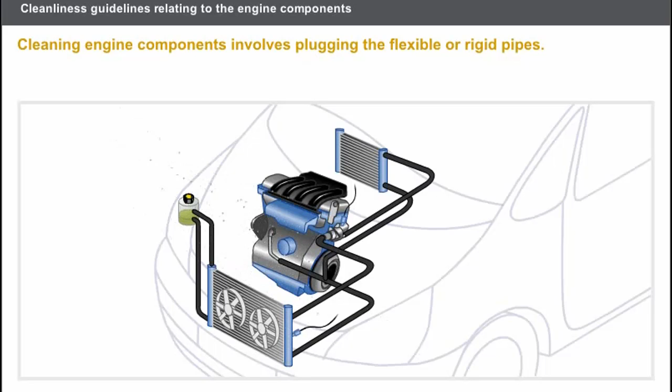Let's have a look at the guidelines relating to engine cleanliness. Particles must be prevented from entering into the various engine air, coolant, oil and petrol or diesel pipes. When removing a flexible or rigid pipe, it must be immediately blanked off using plugs.

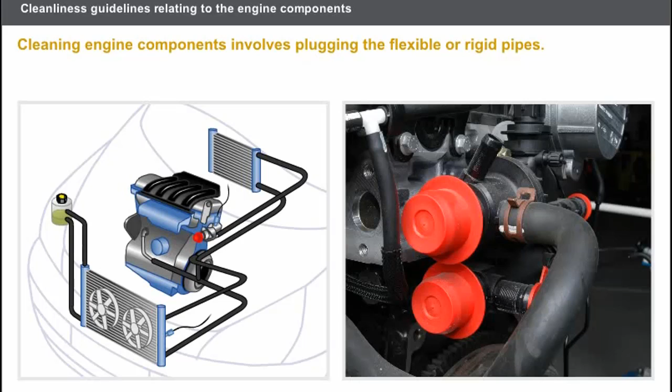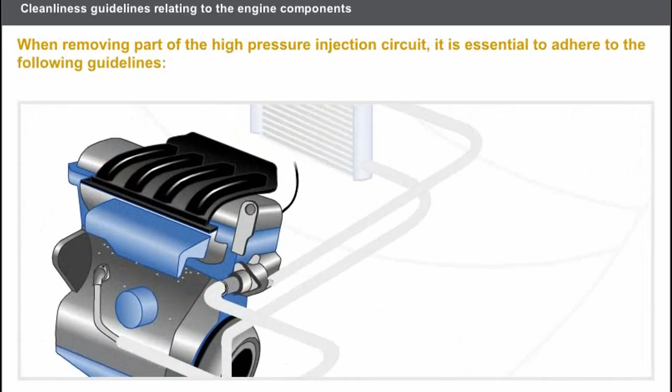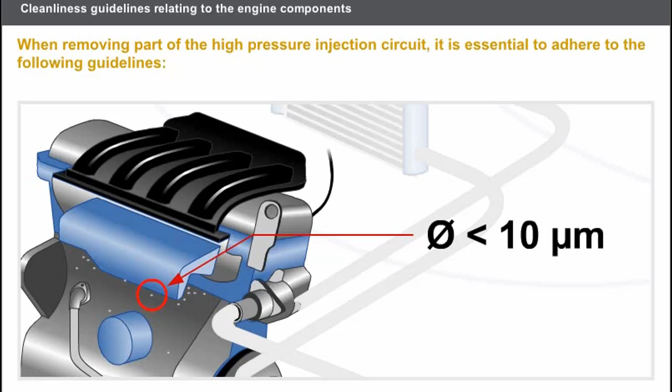Let's look at the special information relating to high-pressure diesel injection engines. Tiny particles of dust, made up of just a few microns, can cause incorrect operation of components and leakage. When removing part of the high-pressure injection circuit, it is essential to adhere to the following guidelines.

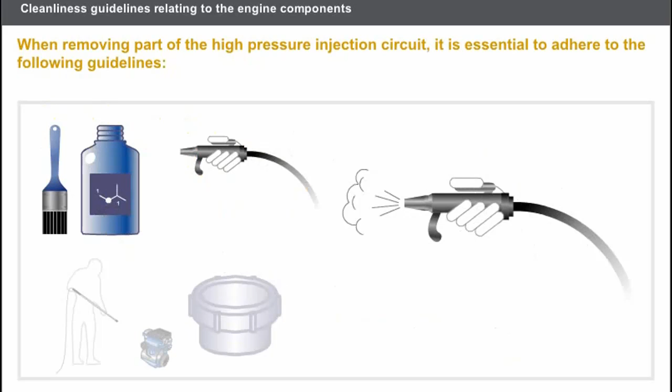Cleaning any of the areas which could cause contamination of the injection system must be done with fresh cleaning product and a clean brush that is not losing its hairs. Compressed air must be used to blow off any excess cleaning solution and any residual particles. The use of high-pressure cleaning tools is prohibited as they cause damage to the injection system and the electrical connections.

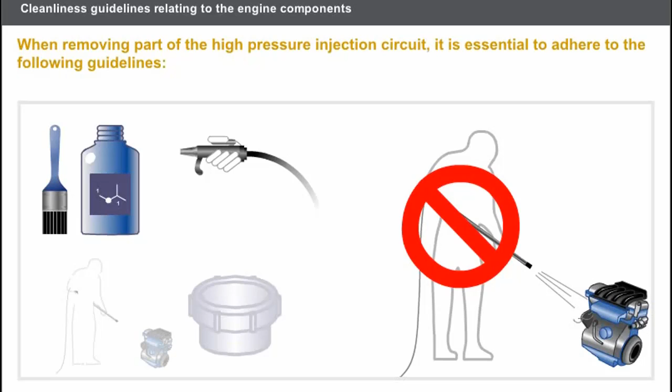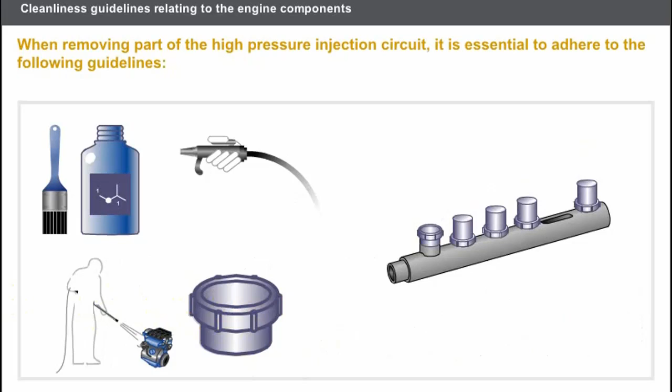After opening the high-pressure fuel circuit, all apertures must be plugged using blanking plugs available from the parts department. All used blanking plugs must be thrown away after they are used once. Before carrying out any operation, it is essential to refer to the technical documentation specific to each engine type.

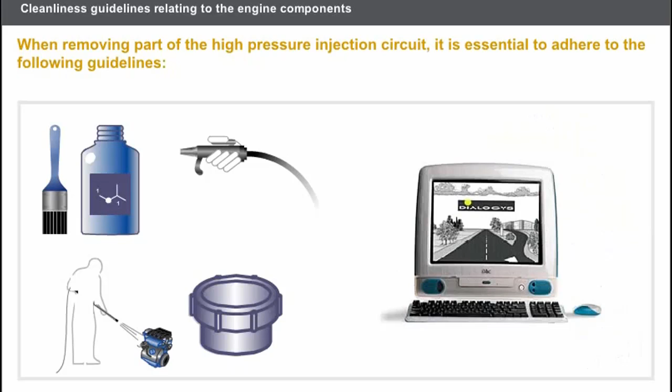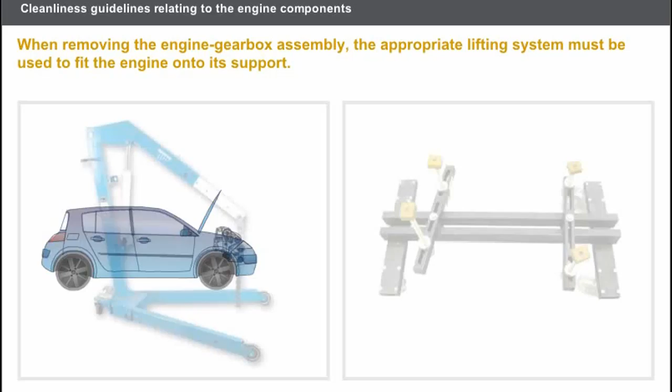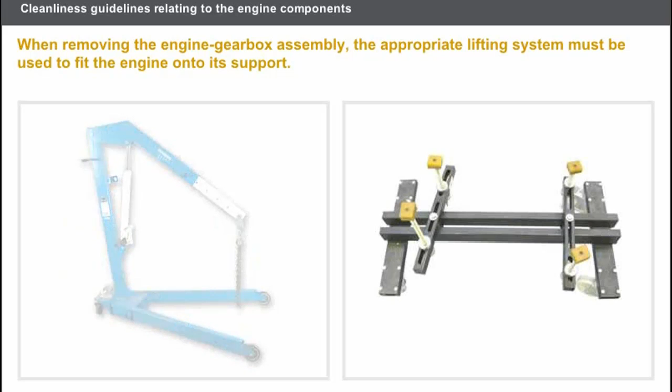When removing the engine gearbox assembly, the appropriate lifting system must be used to fit the engine onto its support. Two lifting methods are usually used: lifting beams to take the engine out from above, or special supports which allow the engine to be removed from underneath the vehicle.

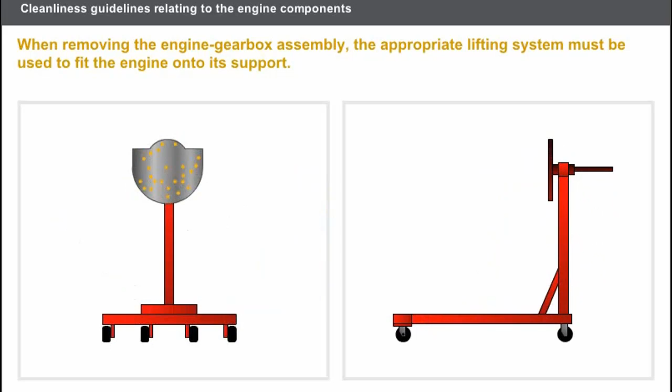Once the engine is removed from the vehicle, it must then be fitted onto its support. Each support has special locations for securing the engine in place. In all cases, refer to the technical documentation.

Certain components to be removed must be marked so that they can be refitted in exactly the same place and in the same position. You must observe certain precautions when marking the components so as not to damage them. It is essential that you use an indelible marker pen and not a metal instrument.

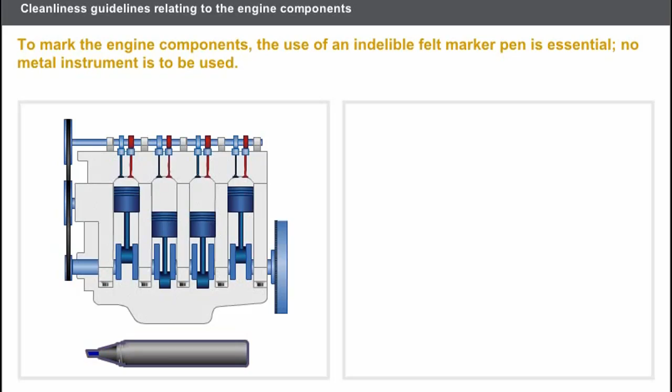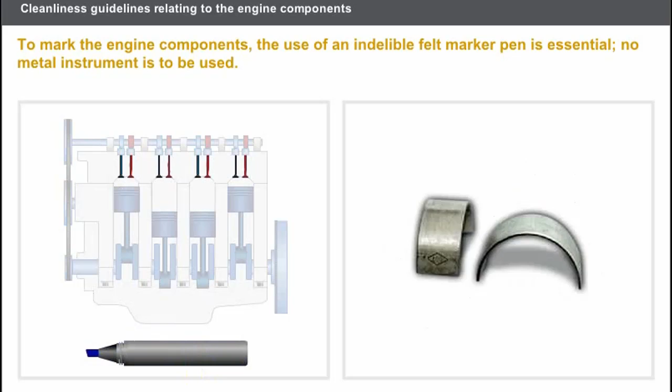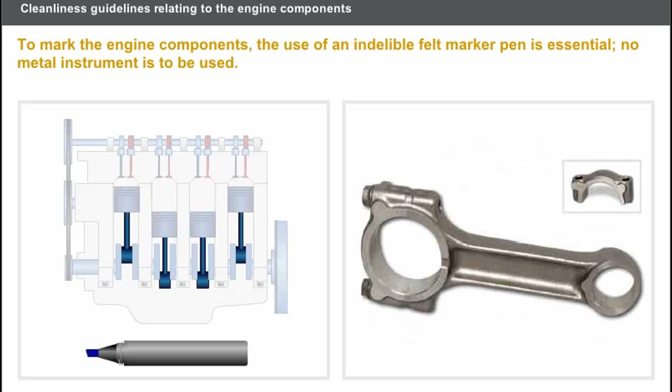You must mark the rockers or tappets, the inlet and exhaust valves, the bearing shells, the valve springs, the pistons, gudgeon pins and piston rings, the connecting rods and the bearing caps, and the camshaft bearing caps.